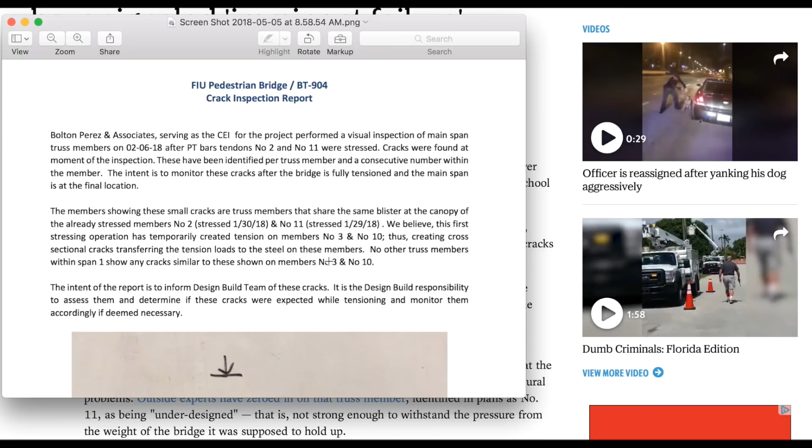We have to note, February 6, 2018 is when the inspecting engineer made a report. But today I started on this at 5 a.m., and I've got quite some hours in this, believe it or not. So now I'm redoing the video over and over again, and I've got about 2 hours of other videos, combined 3 videos.

Okay, we jump into the article. Let's make a couple of statements here. Miami Herald, great that they're trying to get data out there, but they're getting wrong data out there. And when you get wrong data, it's terrible. You have to have a way to change your data. This Miami Herald does not change with the facts. They just don't do corrections in their articles. They also quote things like this.

I'm going to jump around here. 3 independent engineers who examined the photos, records, and bridge blueprints at the Herald's request concurred the cracks were a red flag, just one, not plural, signaling potential critical structural problems. Outside experts have zeroed in on that truss member.

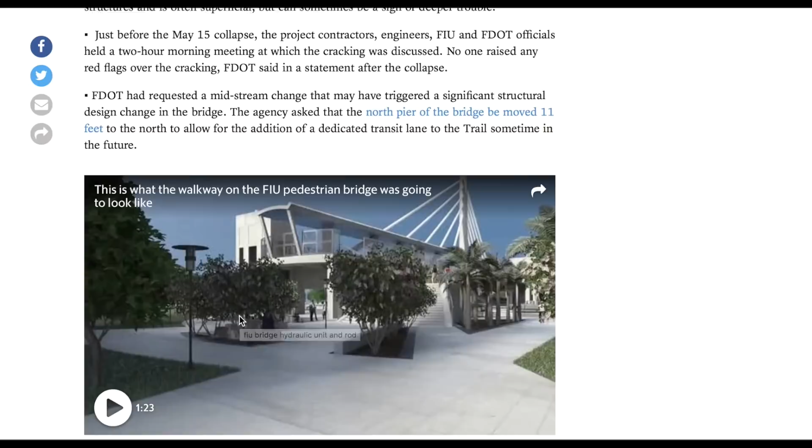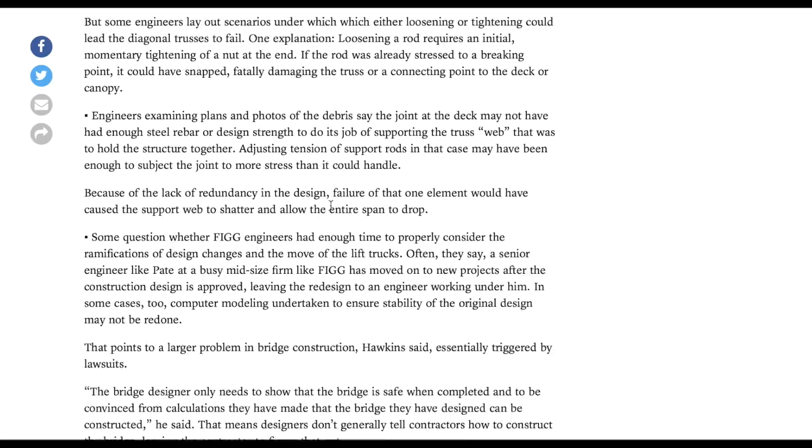And it's a link, you click the link. And what does the link do? It links you back to Miami Herald in their article dated March 15th, which brings you down to, and I'm going to get around to these bloggers, AVI, this person that they're quoting as one of the experts. When you made a comment there, you then make this whole thing an expert comment. That AVI is a tool guy, he plays with tools. And you date it back to a time when we have more data now, better data than we did then. Now let me show you a few things.

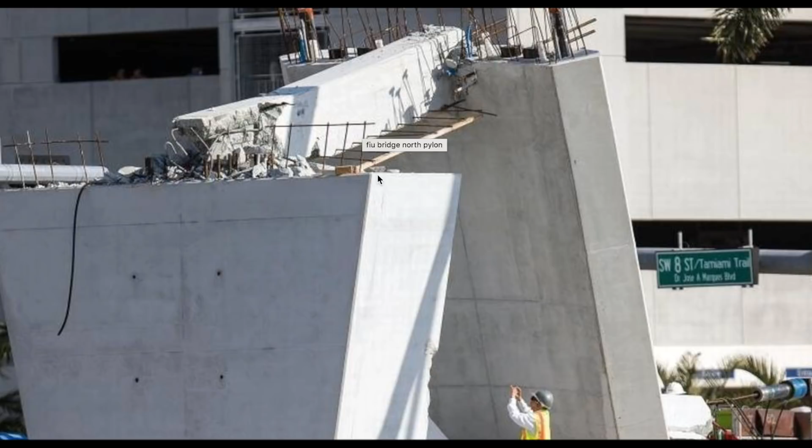One of the things this article is going to be talking about is shearing taking place here. That shearing took place here. It forced that this member was sheared here.

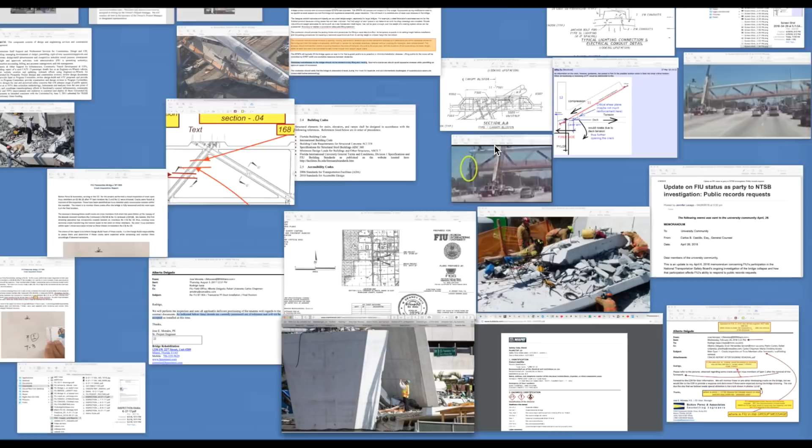Now I'm going to show you something awesome about this whole thing here. You see this breaking here? That's the underside of this breaking. Now it could have been when it collapsed and crashed that this went up like that, but you would see some cracking too. But let's just call it delamination. We see no coating here, incidentally. But watch this, we're going to go to a few things here. This is what the article is going to allude to, that the shearing took place here.

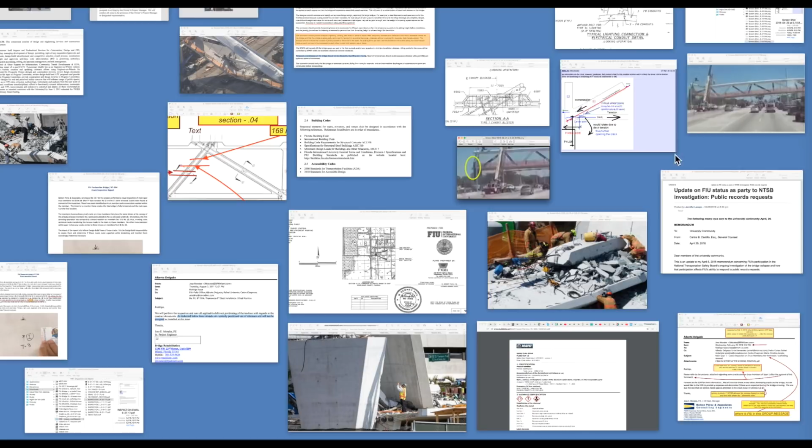Let's just go to the article, and then I'll come back to that. And I went to the bloggers and found their information. For me to do that, I have to come back to the article. And we come to the article. Identified in plans as number 11 as being under-designed. Well, you can't determine if it's under-designed because we don't know the full design of that. This is not strong enough to withstand the pressure.

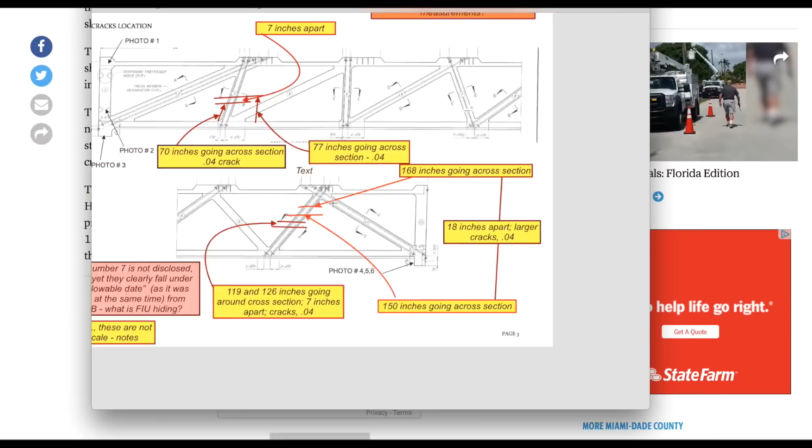Now you can state facts. I'm going to say it's a fact that this number 11 is different design than number 2. And then I work with the data, the facts. The facts are this has post-tension members inside them, cables, let's call it 1 and 2, and 3 and 4. The reason why I do that, this can be 1 and 2 reversely. This was completed first on the bridge, and then this is number 3 completed, and number 4 was the last one being worked on. Now I'm going to give you some quick teasers, and then I'll get back to it.

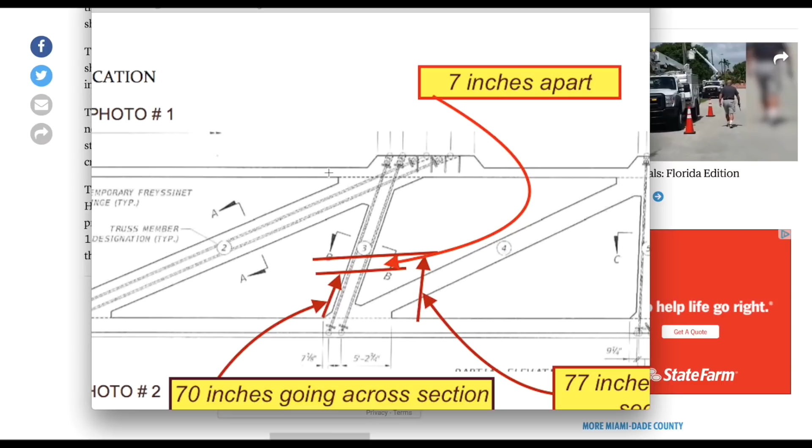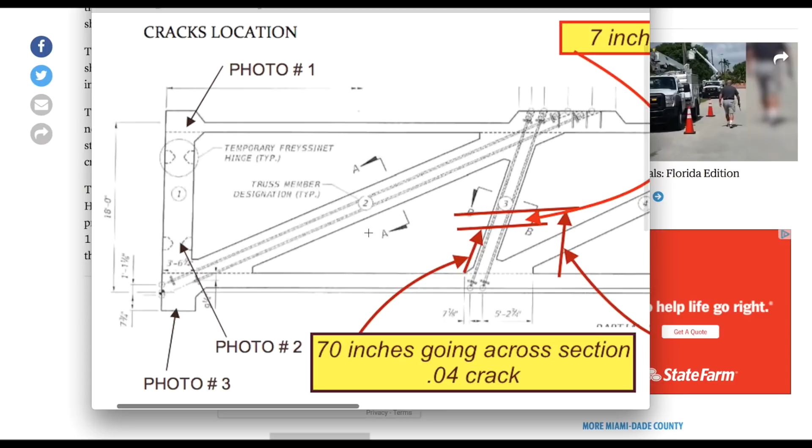Maybe this will keep you watching the video. Take note that these two are more divided equally in this member, 1, 2, and 3. And they're also anchored at the bottom. But then no one's talking about shearing happening down here. But yet they're talking about shearing happening here. I've grabbed this from the article.

Structural, this engineer supposedly, he's showing shearing here at number 11 in the deck. So the force is going this way, and you're able to create the shear because you're anchoring at this point, pulling with a downward force here. Well, for shearing to take place, you also have to move number 12 at the base. You have to move it. This is together, these are together.

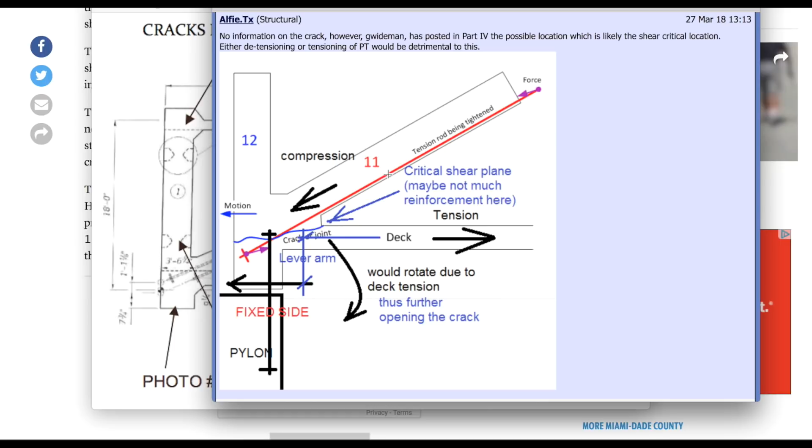You just can't move number 11, creating a shear force, without moving number 12. It's all connected. If you told me this crushed up and this was so stable that this crushed up and broke apart, yeah, but you have your shear line, which they all say in these bloggers. I've followed a few of them the past few hours, looking at them, reading them, and this is the contention. And to move this to shear, to move this, what do you have to do? Move the canopy first, which I've always said. The canopy has to move first, not this. You can't have this movement down here without having this movement.

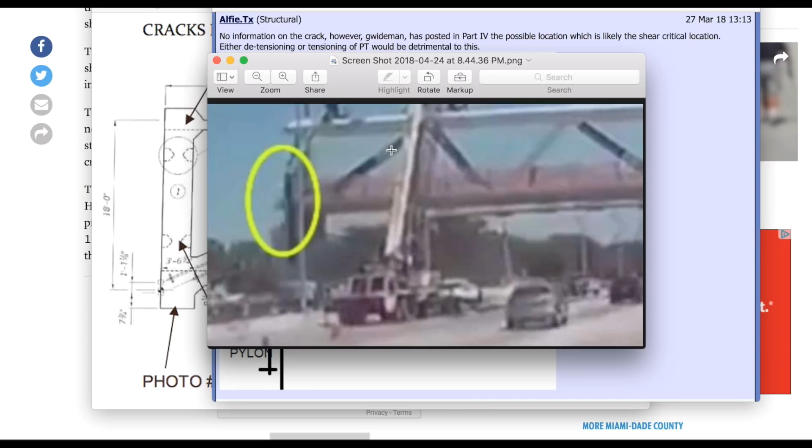This moving. And to move this, you've got to move the canopy, in which I've always said the canopy is the failure first.

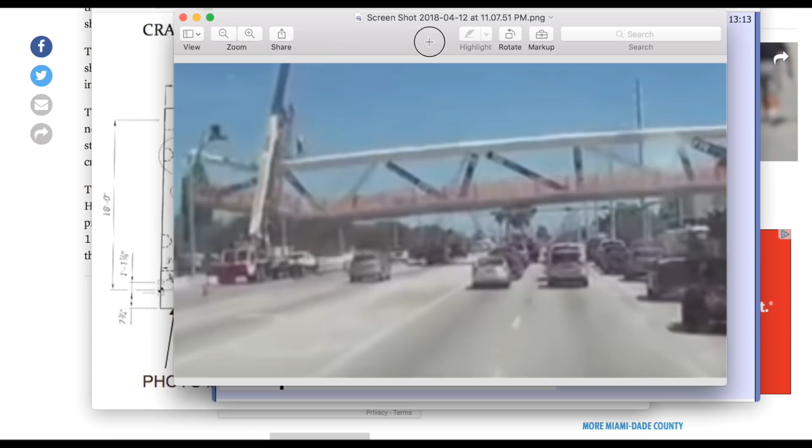And to get the movement, now watch this, what most of them aren't paying attention to. They all have this breaking.

Remember, a lot of people are always saying, why did this not fail down here? Well, it's a different design. Plus, we don't have the forces coming to the same here. And I'll show you, bear with me here.

But notice this, this is falling this direction. It's not just falling down, it's falling this direction. As we know, it fell off and it leaned over. As it falls over, it's pushing. It's literally pushing. A force is going that way.

Look at the shape of this triangle, if you will. It's now leaning away. This is down inbound. So imagine this is this one. It's approximately here now, let's call it, but in relationship to this number 10, this is still pretty much in line. This is number 10 and the top of this canopy, and this number 9.

They're about the same, a little slight buckling going on here, but apparently, because it's ghosting, the video ghosted it, so we have faster movement here based on pixelation. That's photography stuff, yeah, I already said that in another video.

But notice this is pushing away. The top of number 12 in the canopy is pushing away, because as this broke, this broke secondarily.

The forces transferred down, as I told you guys. This then created a force going this direction. And it can only push so much before gravity and the dead load just made it drive downwards. So it shifted over and then dropped down.

And you can see it here. And as it dropped down, it pulled. This is still attached here with some reinforcement, possibly the post-tension cables, the longitudinal cables. And as it came down, it pulled it, and then it pulled it back over towards this direction, back towards inbound. And as it came down, it created a hinged effect, breaking the base.

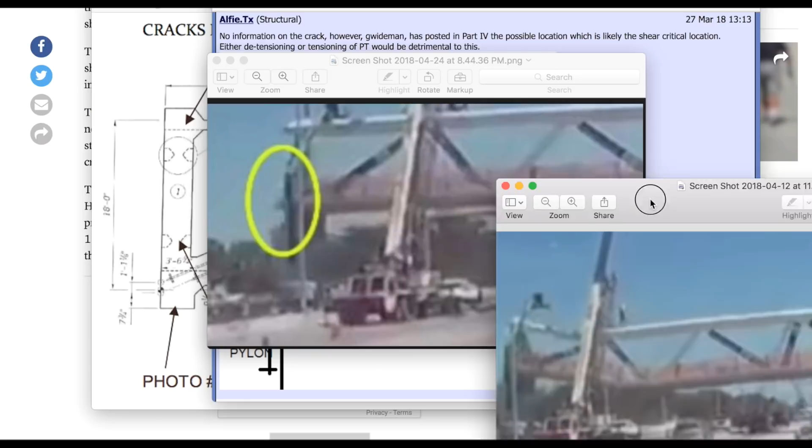So all this, you can see again, this triangle is pushing away, not that way. Hopefully you guys will see that. Here it is here. This is no longer upright. This is a triangle pushing away. And then as it comes back down, it pushes back.

And, okay, so this is just, I'm sorry guys, it's just ridiculous.

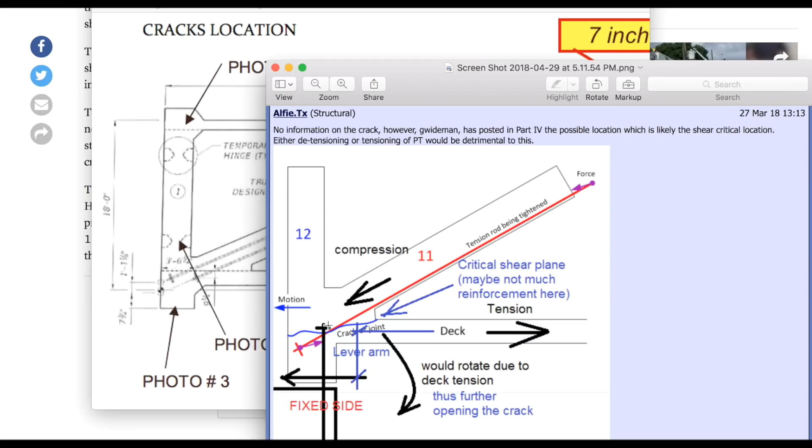Now, with that said, if the NTSB determines that this failure happened here, I never had any respect for the NTSB anyway. So you guys, they use fake videos. They don't use real logic. They don't answer to anybody, to the public. They don't take answers or questions. How did you arrive at that? They don't change their position.

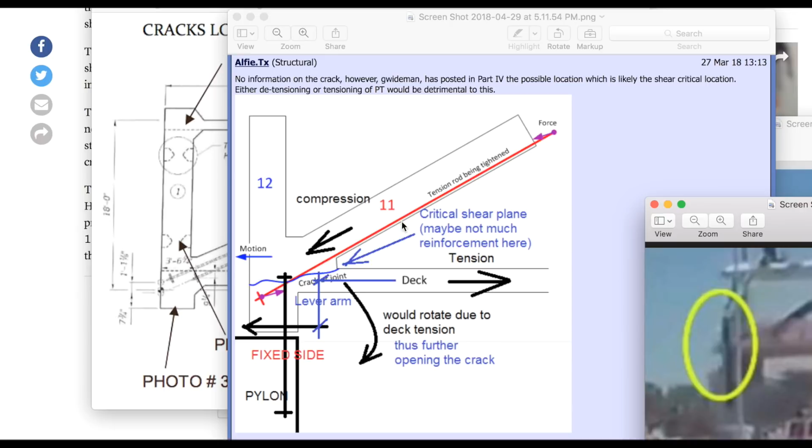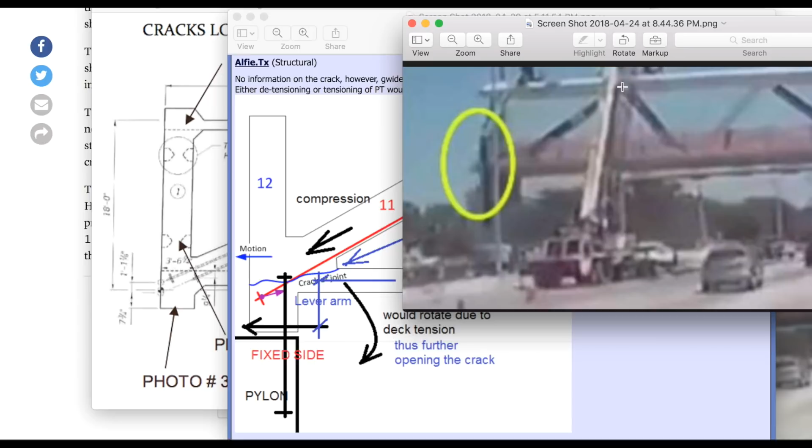That's it, I'm willing to change my position. You show me something where you can show me that this one cable is capable of pulling over this much concrete, pulling this entire section over to create a shear here, I'll change my position. But I'm going to show you something why this failed up here. Why? I'm going to give you not a why, because I have to leave open for a mistake, right? For an error. So I'm going to show you why I think it failed, and you should love it.

Okay, so now I showed you some new data here. Now, yes, as this is failing, this is buckling. I like to, and if this is something at all, then I'd like to even say, because remember, we have ghosting here. We're showing no member, so what's going on here could be nothing here either.

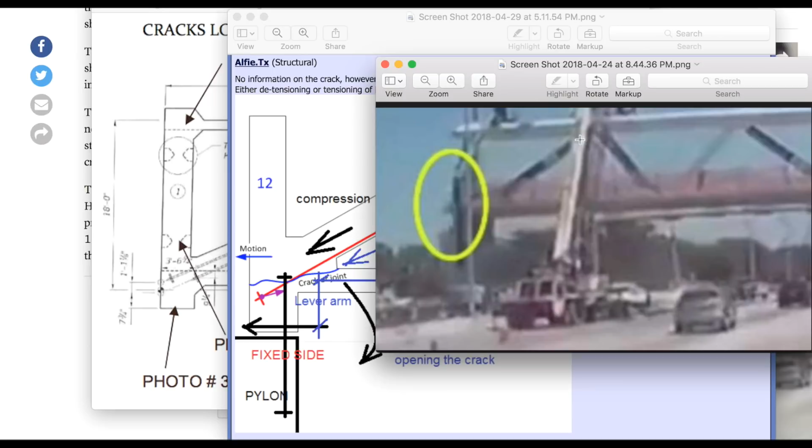I'm calling it ghosting, a photography type term. This could also be just literally a puff of smoke from the floor drain, as someone said, or from the drainage of pipes or anything up there. Remember, this is a hollow tube coming down here in the post-tensioning member. Also, we have this banner around here. This could just be wind blowing down here by chance.

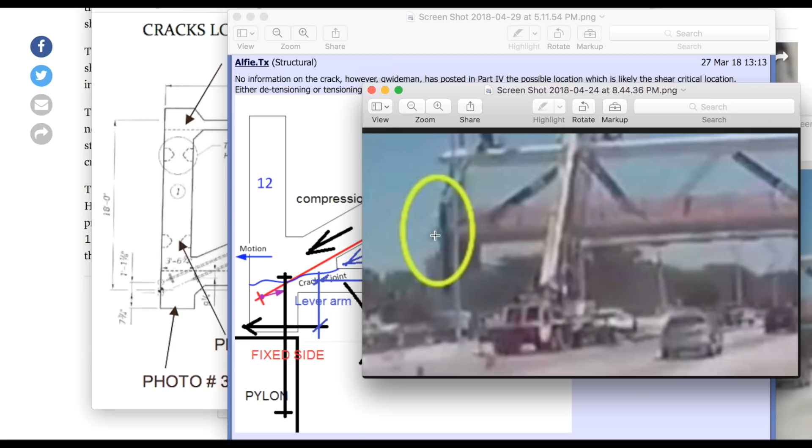Remember my post hoc thing. Just because you see one thing does not mean they're related. And that's the problem. They're basing everything off of this as their smoking gun, that this is the beginning of the failure, because they see no other, they're incapable of seeing any other failure in their mind. They need to physically see it for them to be able to visualize it.

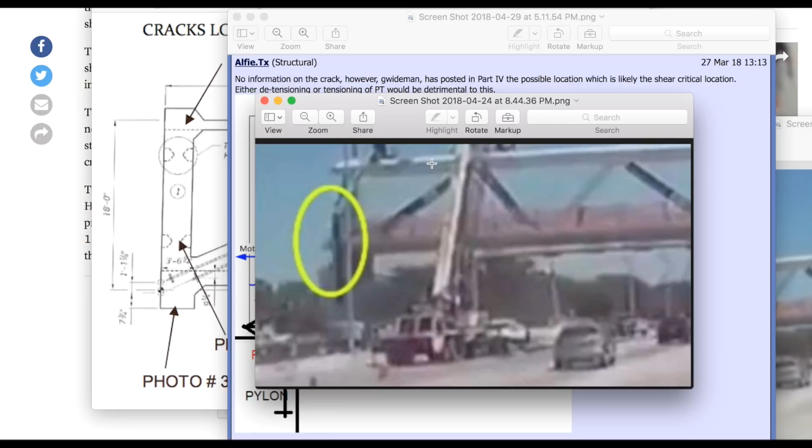And that's with all these people that claim to be engineers, and some of them are engineers. You know, just because you see one thing, that doesn't resolve everything. Just because you see, you understand what that means. No, why didn't it fail down here? It's a different design. Now you're going to like this. I'm going to give away the teaser.

So we're back to the 1, 2, 3, and load path. So let's talk about load paths on almost anything. As you apply a load, say this was on the ground, right? It's a counter force also, but it's not just right here in this column creating a force going downward. It actually creates a force going on a 45 also. This is its zone of influence, as I'll say commonly for you guys.

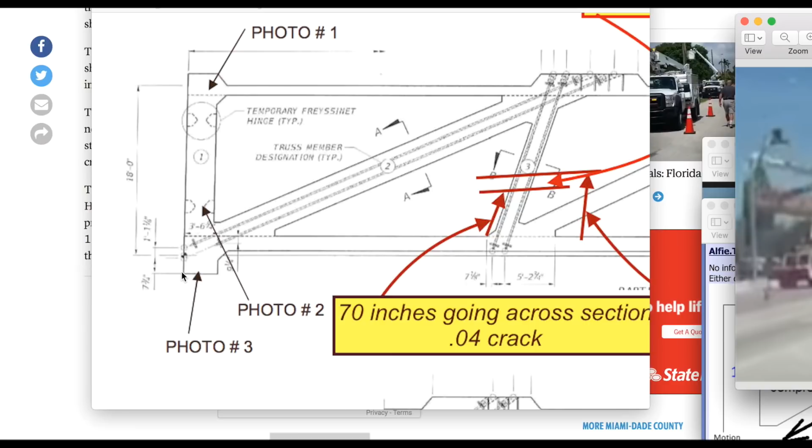Right here and here. So if I was to take away dirt, in your theory, in a typical person's theory, it goes straight down. If that's the case, I can dig all this away right up to the side of it, and nothing will happen. There'll be no failure at all. The load's going straight down, so there's no chance that dirt will buckle out and force out because, well, there are no forces going out in that direction, right? I'm being facetious. Yes, I'm showing you that you can imagine the dirt would come away. Now, some dirts can take the forces depending what the forces are.

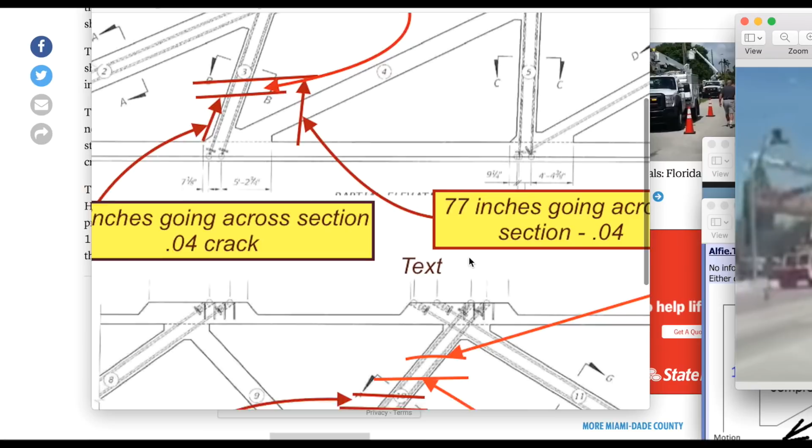Now, watch this. So this is in the center. Now, here's the kicker. Watch this. These are on the ends. And I've talked to you guys about the load path here, how the forces, how you can create buckling by tensioning this side and then on this side, create failure and then create tension here. But watch the load path again. So remember, I just talked to you about, come on, I'm trying to enlarge this image. Oh, I'm enlarged. Watch the load path.

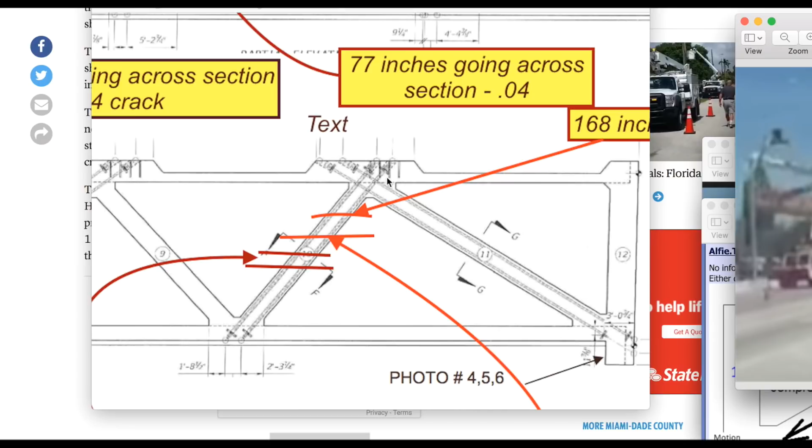As these plates, I'm going to show you on this one, as this plate, the load path is coming down, and here's the concrete continuation of it. It's going straight up, and it's down the side here. It's 1/3 in, and the same thing with this one. They cross each other. I spoke about that in another video. The chaos mathematics of this must be crazy, but this force comes down on top of that anchor, in fact, which is then transferring load down to there, which is, well, wow, chaos mathematics for me. And it comes down.

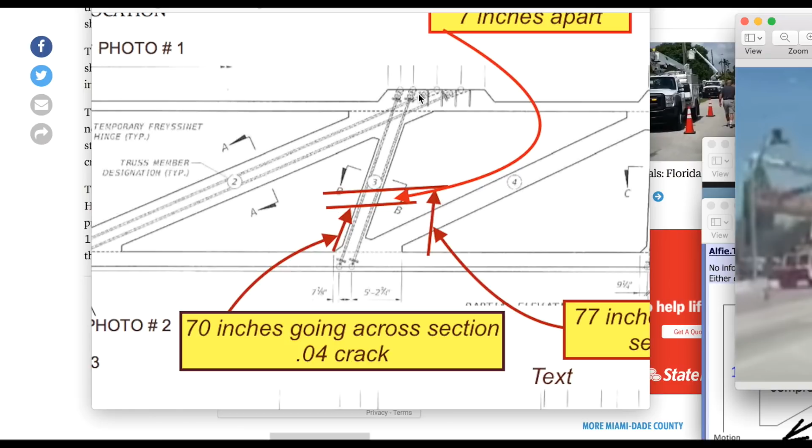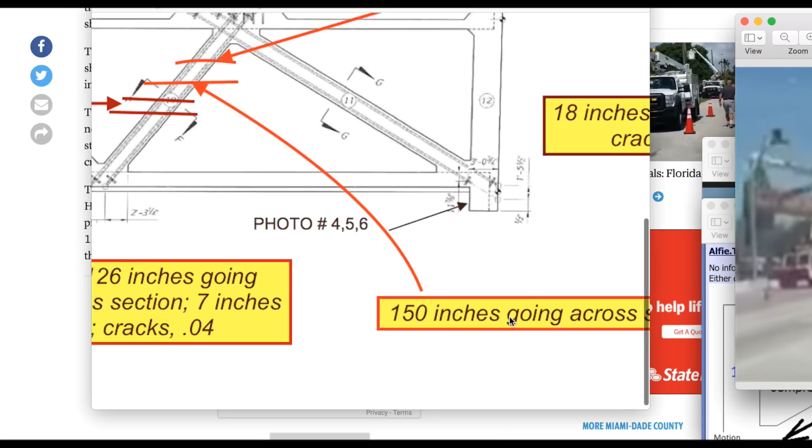It's going down here, and it's continuing down the column concrete. Wait a minute, look, watch this one. Here's the bearing force. Now let's say it's no 45 at all. It just goes straight down because some people like the forces that can just go straight down and they can't visualize a force going at a 45. Let's just say these forces go straight down this column.

What I'm showing here is that these are not all the forces, but I'm trying to give you a visualization, if you will, of how you'd have to balance this or post-tension these cross members with a delicate thumb, if you will, delicate handling to make sure you don't throw it into an imbalance while you're doing this cross section.

You can also see that this is much different than the number 2 above at the blister section. That there's more cover, that the location of those post-tension bars being more centered as opposed to these being to the outside creates a different force. Could be an explanation on why they had no issues with number 2 as opposed to number 3, as people would like to see why they didn't have an issue. Something as simple as that, something overlooked and as simple as that. Food for thought for you guys.

Watch, it goes straight down. Whoops, it's crossing outside of the canopy. Huh. And then it's coming back into the number 10 member, and then it's continuing down. I want you guys to use a string on this piece of paper, and on the drawings if you like, and you'll see that it clips the canopy right here. These forces do. Right about there is where these forces align.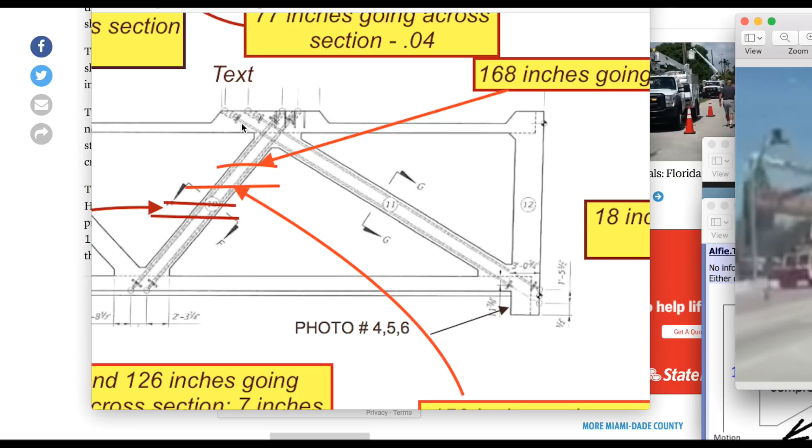And if you could scale this, you would know how much concrete it's applying before it skips out of the canopy, and then it's required to skip back into the cross member 10 and back into number 11 again. But remember, forces don't work that way. They're going to come out on an angle. So basically, we're creating a chaos mathematics again. We're creating some weird forces going on here. Boy, oh boy. And then we've got jackhammering around here to access something, and we have jackhammering.

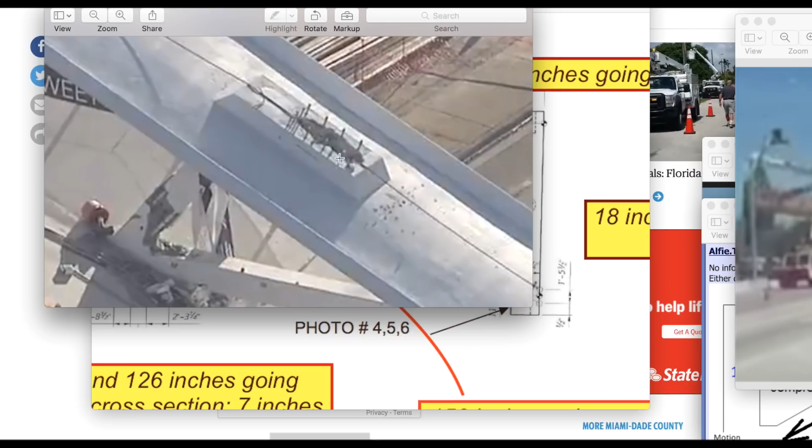So they did not expect the flyovers or these images to be public because they thought this would be covered by a plate ultimately with the pylons. So we know that the flyover of the drones at nighttime showed these nodes; they look like this, and no one, knowing that you've got to come back in there and work on these post-tensioning members, would make it look so raggedy.

So I think they did have a nice formwork set up there, knowing that they had to come back and detension, because the plans say they should detension. Or they forgot to put the form on there around these guys, and then they went back in there with a jackhammer and resolved it that way.

While we're here, we're going to address this long rope here. This long rope is the lanyard for the men to support themselves on. If you look at the end of the structure down here, you'll see that they have the rope around the structure, and also a protection for the rope and pipe so the rope doesn't cut itself through.

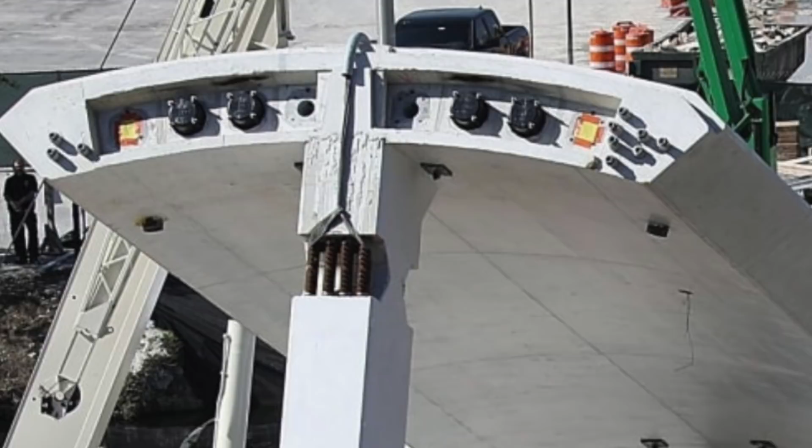Okay, let's go to this 2016. These are the plans dated 2016, and I'm going to come back to this. And we go back to the Herald. The Herald doesn't have very good reporting because they do all this public information stuff, releases, and yet you can clearly go to FDOT's website and find, based on the plans for this bridge, that they had a pylon location meeting, and the result of that pylon location meeting is dated October 31st, 2016.

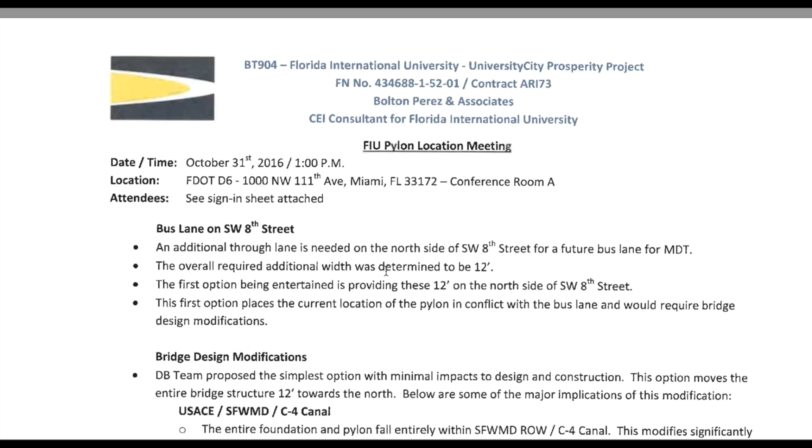If you come down to bullet number 2, the overall required additional width was determined to be 12 feet, no longer 11 feet. There is no addition past this. Let's change this to that. We changed it now to 12 feet. So the Herald is bad data for you guys. That's awesome that they can force data out with the lawsuit, if the lawsuit was resolved, which I don't think it was.

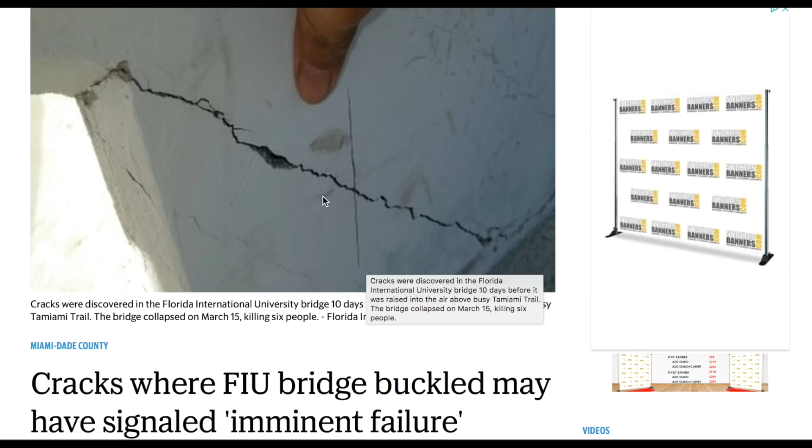Okay, in this screenshot, take note of that. The rods were apparently a modification to the plans added to the bridge design after FDOT asked FIU to move the entire bridge 11 feet north. Well, this is a wrong quote. FDOT never asked for 11 feet to move it. It's 12 feet, as I showed you in the previous clip.

Also, if you read below the highlight, these same engineers in part of this article also stated that the transporter being too close to the roadway on the canal bank would be an issue. I stated in a previous video that would be an issue, and that's why you'd want to bring them more inbound and away from the roadway edges.

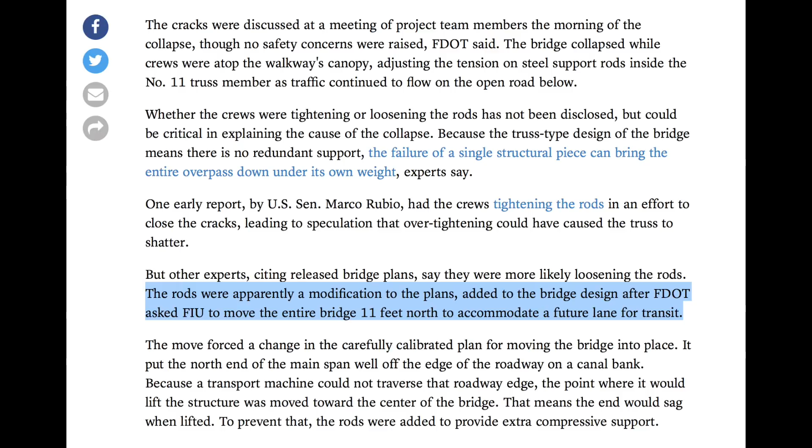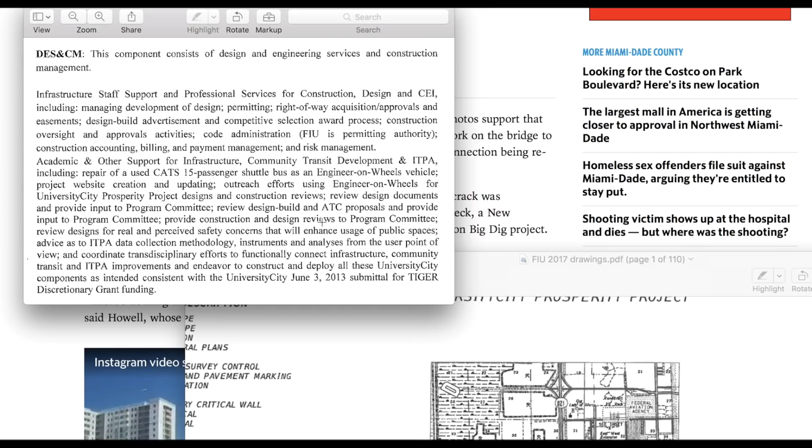Including managing development of design, permitting, right-of-way acquisition, approvals, and easements design. I'm just going to read on. It all falls under FIU's permitting authority. FIU is ultimately the one responsible for everything that happened there. They're supposed to be there, okay? Reading on, they're supposed to resolve all of this. Data collection, methodology, all of this stuff is FIU. FIU, FIU, FIU.

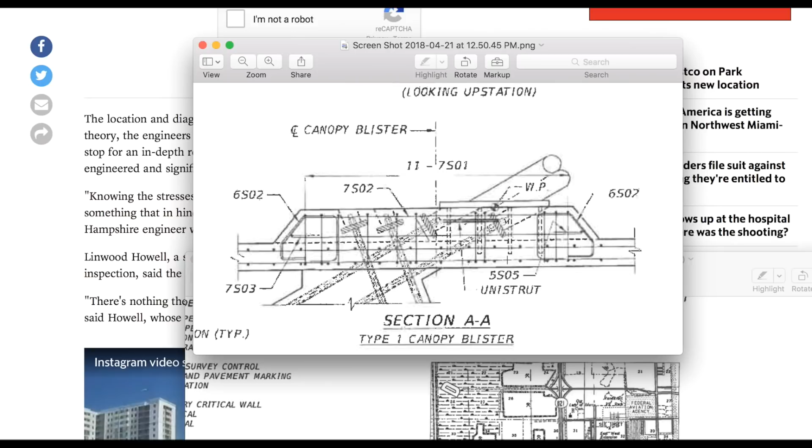Clip this image there, because that's open for negotiation on my part. Here's the canopy. Oh, they may look big and beefy. There's the blister. The canopy. We're only talking 1 foot.

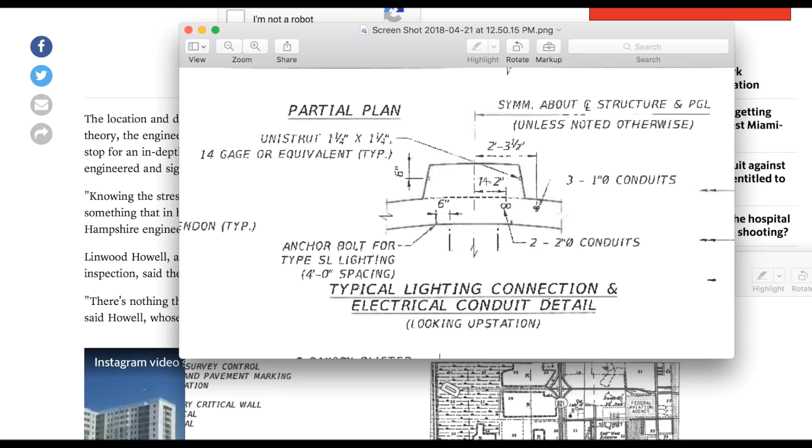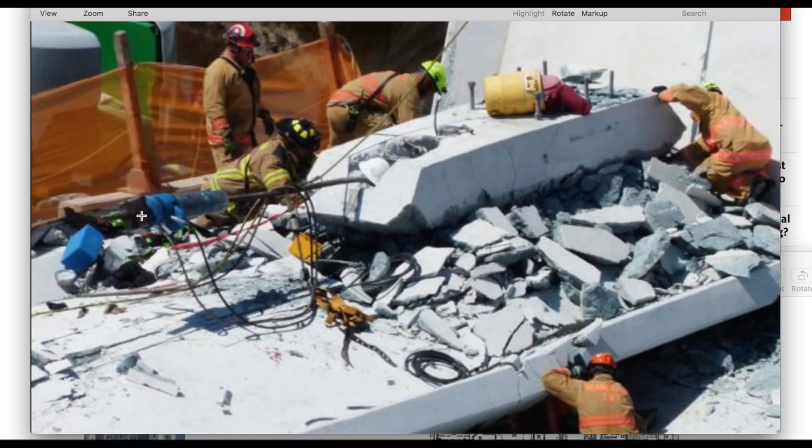Then we add in two 2-inch conduits, which are placed right alongside the load path of the post-tensioning member of the plate, of the top plate, that big huge plate you guys saw here. This guy. This plate here is a plate that's down there. It's a huge plate, and it's capable of transferring the forces downward.

And if it's right here, let's call it right about here in line with the outside of the column of the diagonal, it's right here. Right next to it is another void, 2 inches, total of 4 inches. All right, so that's going to eliminate this thickness. If it's 1 foot thick, now we've got the 2-inch void here, and that's 2-inch

OD, outside diameter. Might be ID. I don't know which one it is, but it doesn't matter. It's 2 inches. If it's ID, oh, it does matter, but it's 1 foot 2 inches off center line, so you could actually figure out exactly where this void is if this was placed in where it's supposed to be placed. But as we know, this company, MCM, has a placement issue, so it could be even closer in.

So our cover here above this 2-inch is now, so to make this fail, all I got to do is break this little bit with a hammer. I can hit this little bit. Now I'm down to 2 inches plus this, say 2 inches of cover. All I got to do is hit 2 inches.

A walkway. Your walkway and your sidewalk out there in your backyard is about 2 inches. Back if you have a house built in the 50s, they pretty much did 2-inch walkways. 60s in the city houses, 50s rather. 2 inches, nothing. One jackhammer strike, you're done. So we're 4 inches. Now we're down to 8 inches of concrete right here.

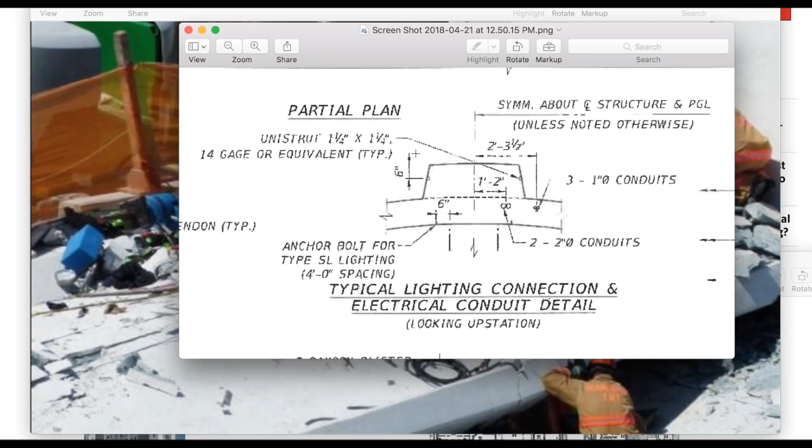This also creates a force. Since it now wants to hang down, you need counter forces because it now wants to create forces inside this area also because of its weight. It's got a weight on the outside. It needs to be resolved with tensioning, with tensile strength, with the reinforcement, all coming back here. Again, I'm not going to go down this path. I'm showing you chaos mathematics. That is just craziness. Okay, where am I with this?

The contractor, I think we talked about this maybe in a previous video that I don't know if I posted, so sorry if I'm redundant. I'm going to talk about this again. I'll pause it. You guys can read it. They did deal with reverse. No, I guess I didn't slide it over, so I still have to deal with this. So allowable temporary stresses and deflection. This is for the SPMTs, or moving company that would move it.

They typically are supposed to be involved in the engineering, as recommended by FDOT, to be involved in the engineering of the structure, so they can then tell you what the forces will be and why they need to be involved, because their machine's going to create contact points that need to be reinforced in such a way that FDOT structural members will likely see stress reversals that may be detrimental, and they actually do not want you to have this. They do not want you to create a temporary stress, meaning adding post-tensioning to members 2 and 11 to counterforce these reversals. 4.6 allowable stresses and deflections per this right here, FDOT statement here.

They will supply soft support for the bridge. In this case, it was wood cribbing. Moving on. They do not want you to do counter forcing is what this amounts to. The contractor should provide analysis for jacking, moving, and erection loads to ensure the temporary stresses and deflections are within allowable values for the bridge, and that the bridge is adequately reinforced to handle the calculated temporary stresses without cracking. Notice that, without cracking.

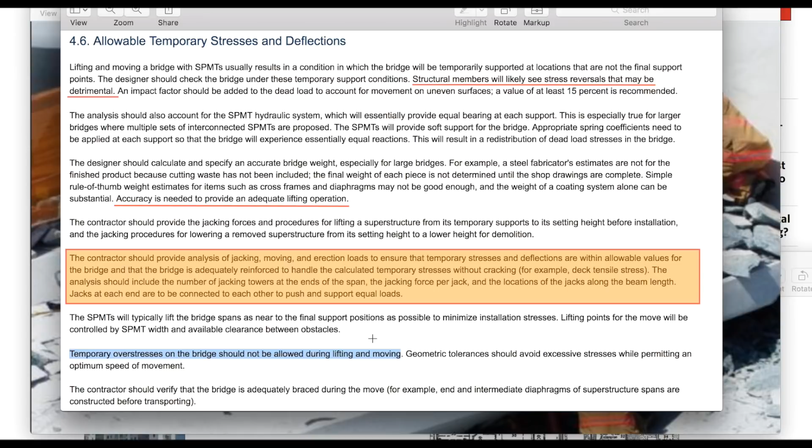Get it? Should. All right, I'm done with that one. And I think it's more for jacking. Okay, we're actually wrapping it up now. We're getting faster on this one.

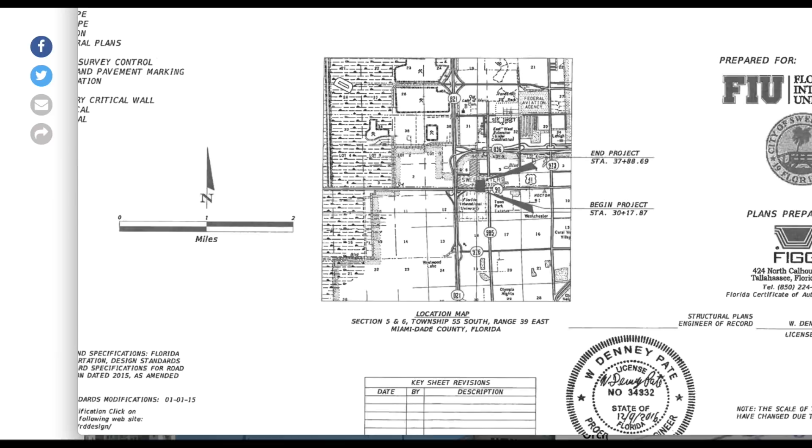So back to 12/9/16. That was the original date of the plans after they did the 12-foot expansion. Why 12 foot? And this shows why you should not follow this as science, if you will. And I'm biased. I think the NTSB does terrible reporting. Again, they don't answer to the public. They don't answer to anybody with knowledge. They don't answer to anything that you may ask. They just say, here's what we say the facts are, and this is how it happened, and then they disappear

into the woods. Well, wow, you're talking about trolling. So, I mean, that's some trolling stuff. And if you look at their videos, how they do the reports, they use animations, and then there's never a question about animation. Wait a minute, your animation shows the two buses coming together. They don't say what happened beforehand, and then they show the one bus goes off the bridge, and you say that's it. Okay, and even when they do their data, like the I-35W bridge study, because I have researched NTSB's

studies, statements, and when they do it, they're not open for negotiation, even though they throw under the bus clearly that the federal government had a say in the changing of a node. Then they don't blame the federal government for their participation. They just blame the bridge builder again. Really? Okay. Our weakness. So cracks in concrete are 100% failure.

So if I were to crack a sidewalk, 4-inch sidewalk for you guys, it's 100% failed. The only thing that's holding it together at that point is the earth underneath, if there's earth underneath of it at all. If there's reinforcement across, let's call it rebar, or holding the two together in plane like a dowel. And its tensile strength is holding it together once you put loads on it. And the loads are dead weight also.

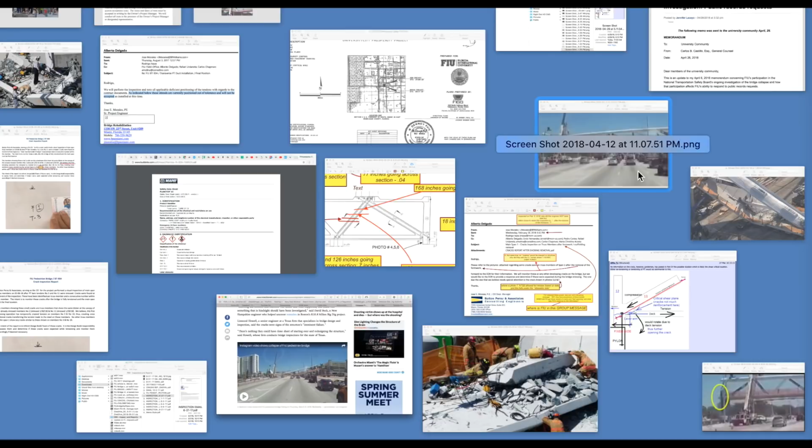Now that's important when I go back to the other videos, images. There's nothing they could have done short of starting over. You know what? I said in another video, I kind of agree with them on that one. They need to know that if these cracks were not predictable, which they are predictable at intersections, cracks predict. That's one of my videos where I'd say, wow, how did they handle all expansion in this? Because they've got so much going on. They have so many lifts, concrete pours.

Yeah, pour here. This creates a joint between these. These have a joint. These truss members, if you will, or webbing, one of these truss webs. They have a cold joint, and they have a cold joint here between the deck and the canopy. And then they have cold joints at the blisters and the canopy. And who knows where else they poured. And they have joints wherever grouting took place, and anywhere else they poured another pour.

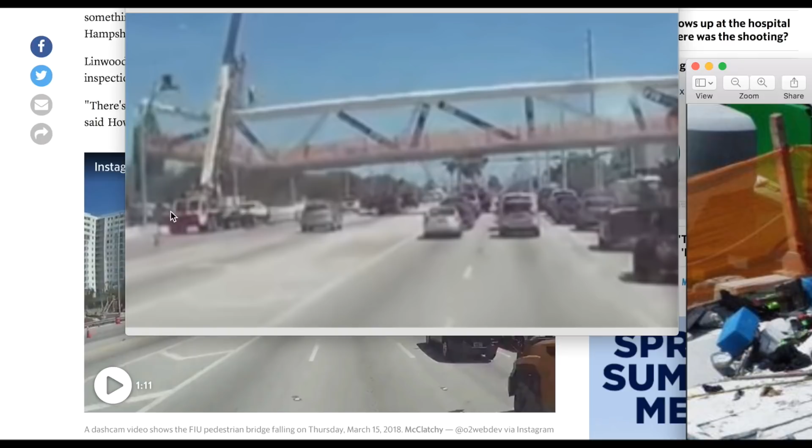Coming back to this one. This has clearly not been jackhammered into. This is the tooling. There is the lanyard coming from here all the way across. It was not held up by any crane. They use the lanyard. Why would they hold themselves up by a crane that could move and tear the man apart if he was still connected to the crane?

This is the article over here that they're referencing, where I mentioned in another video that the attorney had an agenda releasing that article ahead based on the dates, because they could release everything from February 19th, and he released something dated February 26th. And I even made in one of my videos, I don't know if I posted it, or maybe it's the last one, where I said, well, you know what, he could tie it in because it is related to the February 6th.

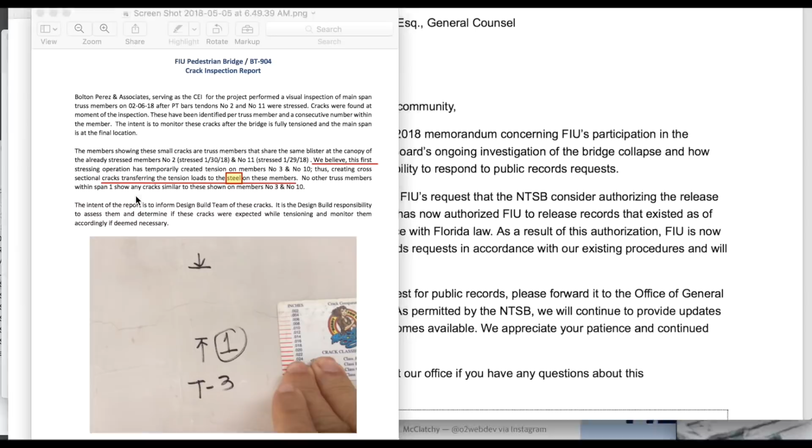This letter is related to this February 6th, 2018 documentation here of the cracks. So I extrapolated, you know, he could reach, but it appears he wrote and said that, no, I didn't mean to release that part. Whatever. All right. But he also wants to control the narrative, as I said in the previous video.

If you receive a request for public records, Please forward it to the Office of General Counsel. He's a General Counsel. He is. He's saying he wants to be the go-between, the filter. As permitted by the NTSB, we will continue to provide updates when additional information becomes available. But, of course, there's way more letters than this that he can release. My opinion, he did this on the narrative. Okay.

And let's see what his response is current day about this article. And we'll go back to that to see if he did release something. There's nothing they could have done short of scrapping it. His whole design, sorry guys, again, I've been up since 5 a.m. His whole design is scrapped because I think the ratio is wrong. And come on, this is just something they should have tested.

It'd been fun, you know, close the road off, test it, and then go, cool. It would only cost us $2 million to test that. The whole build project is $19 million, I think, but they got maybe $2 million in this. Okay, that design sucks, and the school writes it off and throws it in the trash. And really take it apart and work on it and go, all right, what did we learn here? This is the crime. We could really learn so much.